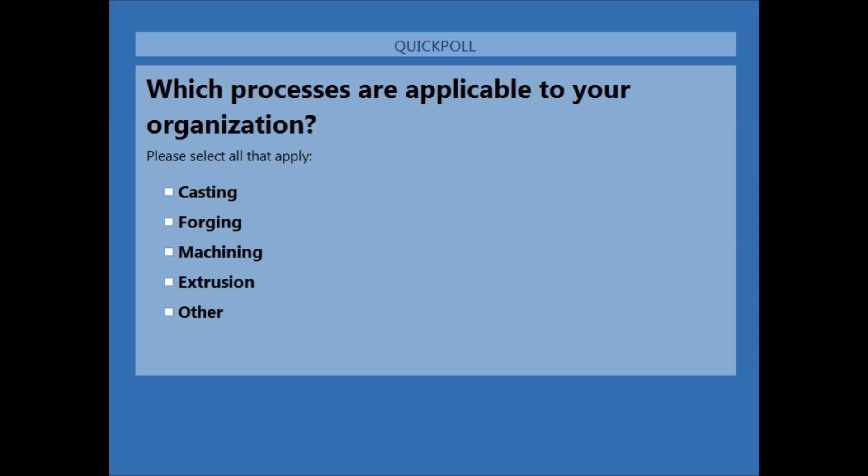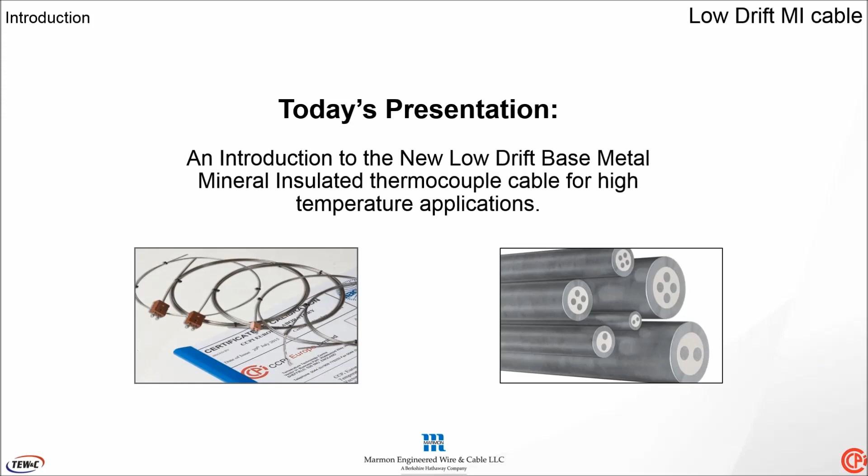We'll get into the presentation. Today's webinar is on the new low drift base metal mineral insulated thermocouple cable, or what we've been terming our low drift product. I invite everyone to download our low drift product flyer, which is available in the flyers section of your GoToWebinar control panel. As we proceed through the presentation, you are welcome to ask questions about the product using the GoToWebinar questions feature, also located in the control panel, and we will answer as many questions as time allows at the end of the presentation.

Just to give a brief background of our companies, TE Wire, together with our sister company CCPI Europe Limited, have partnered to develop, promote, and distribute the low drift product. Both are members of the Marmon Group, which is a Berkshire Hathaway company. Berkshire's annual revenue totals approximately $185 billion. The Marmon Group consists of 175 different companies totaling $8 billion in annual revenue, with over 19,000 employees amongst the group. It has over 300 manufacturing distribution centers worldwide. Within the Marmon Group, TE Wire and CCPI are grouped amongst 13 additional wire and cable companies that make up the engineered wiring and cable sector.

TE Wire, who has licensed the patented low drift mineral insulated technology from Cambridge Enterprise, is a specialized manufacturer of thermocouple wire and cable. It was founded in 1941 with its headquarters in Saddle Brook, New Jersey. We provide both stock and custom constructions with over 14,000 varying combinations of wire and cable.

CCPI Limited manufactures thermocouples for industrial temperature sensors. It was founded in 1984 and has its principal headquarters in Sheffield in the United Kingdom. CCPI is most known for its high quality, high temperature industrial temperature sensors. Both are also companies that are ISO 9001 2015 certified and administer ISO 17025 accredited temperature laboratories.

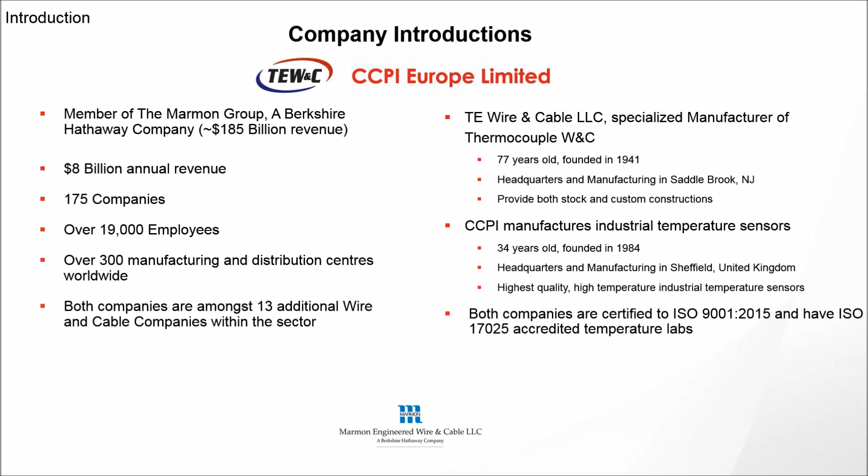Thanks Joe, and hello everybody. As indicated there, my name is Trevor Ford, and I'll be giving the presentation today on the new low drift mineral insulated metal sheath, or MIMS, thermocouple cable. Before I go into the presentation itself, I just thought I'd give you a little bit of a rationale behind this particular presentation. This is the first of a series of planned presentations about this new low drift technology. And this particular one, as I said, is the first one, and it's going to give you the idea behind the development of this new low drift cable, why it was developed, why there was a need for it to be developed, and the history behind its actual development.

Regarding the presentation itself, I'll give you a quick overview of what we're going to be talking about. Initially, we're going to be asking three questions and hopefully answering those questions. First, do thermocouples drift? Then we'll ask, what are the current options regarding low drift thermocouples? And the third and final question: why do we need a lower drift base metal thermocouple? Then we'll move on.

We'll talk about the history of the development of this new low drift technology in the form of a mineral insulated metal sheath base metal thermocouple cable, which is the subject of this presentation. In doing so, we'll have a summary of the investigation work carried out by the organisation that developed this technology, the University of Cambridge in the United Kingdom, and how their research into the causes of drift in base metal thermocouple technology led directly to the development of this new low drift technology.

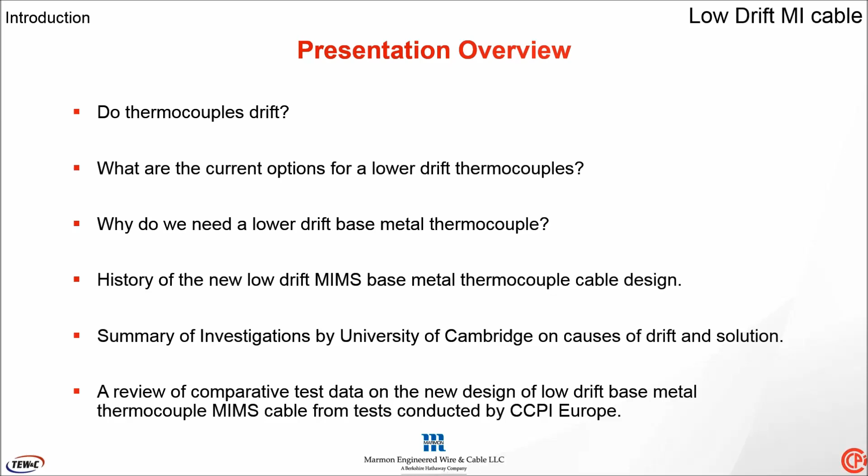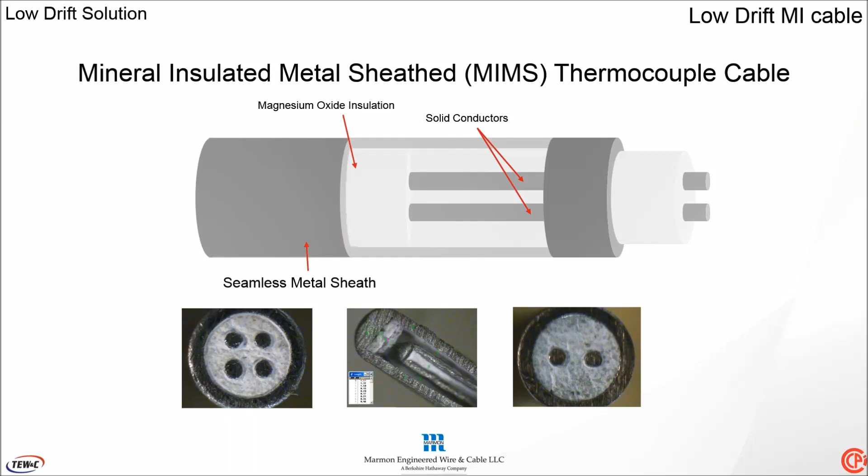Before we do that, though, I thought we'd just give a quick reminder of what MIMS thermocouple cable is. It's where the thermocouple conductors themselves are insulated and separated from each other and the outer metal sheathing by a mineral insulant such as magnesium oxide. The slide you're currently looking at shows the finished product, which you're probably more familiar with looking at.

So into the presentation itself, and the first question: do thermocouples drift? A very simple answer to that question is yes. All thermocouples suffer from the effect of a changing EMF output with time at temperature, usually a reduction in the output, particularly in the high temperature region, and this effect is known as drift.

Probably a better question to ask would be, what is drift level dependent on? There are a number of factors: the thermocouple type, the environmental conditions, the temperature range of operation, and the temperatures the thermocouples actually see, just to mention a few. There are many reasons and many types of thermocouples and thermocouple designs. Some will show higher or differing levels of drift than others. But basically, most of the drift is dependent on both the thermocouple design and the environmental conditions the thermocouples actually see.

As we mentioned, there are many reasons why thermocouples drift. We've mentioned a few above, but really the detail of that is for a different presentation. The point that needs to be absorbed here is there is an issue when it comes to using thermocouples for long-term high temperature measurements.

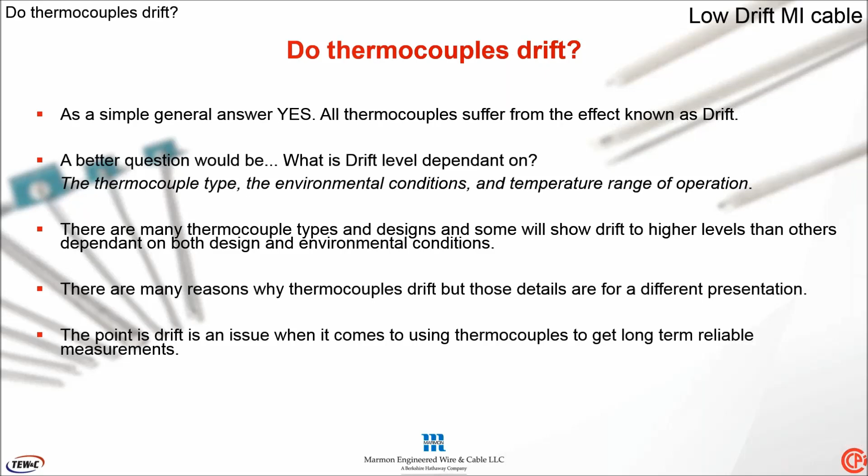So, what are the current options regarding low drift thermocouples? Well, currently, the range of thermocouples known as the noble metal range, or the platinum rhodium based thermocouples, the types R, S and B, would always be the choice for high temperature industrial applications. This is because these thermocouples show the lowest drift characteristics of all the common standard thermocouple types we use, mainly because of the materials they're manufactured from.

However, for the same reason, both for cost and mechanical limitations, these thermocouples are not always an option for industry. The cost is a fairly obvious one: the materials they're made from, the platinum rhodium group, can be very expensive. Also the mechanical limitations: the protection mechanisms needed for these thermocouples are usually ceramic-based sheaths, which are obviously very inflexible and also quite limited in diameters. The most practical option regarding temperature sensors is the MIMS base metal thermocouple design.

This MIMS design gives practical protection for the thermocouple wires for the environments they're used in. In effect, the powder and the outer metal sheathing protect the thermocouple conductors themselves from the environmental attack and contamination. So, for both practical and economic reasons, the Type K and Type N MIMS thermocouples are and will remain the industrial temperature sensor of choice in this high temperature region.

However, both the Type K and Type N thermocouple, particularly when we're talking about temperatures above 1000 degrees C or 1800 Fahrenheit, can also see very high levels of drift.

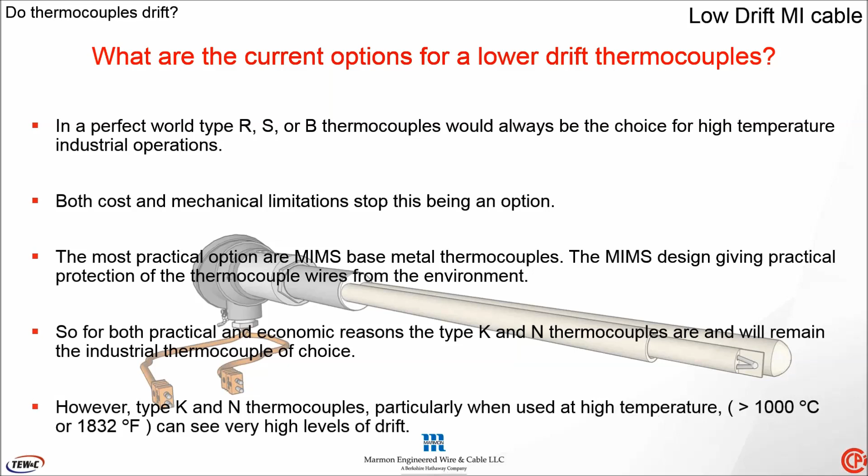So, why do we need a lower drift base metal thermocouple? The most widely used thermocouple types in industry, we've already mentioned, are the Type K and Type N thermocouple. The best overall option from a practical viewpoint is the MIMS design. But there is a growing demand from industry for better measurements in this higher temperature region, a more reliable measurement capability. These thermocouple designs, the Type K and Type N, have not been improved.

We're using the same designs, have not been improved since the development of the Type N thermocouple itself some 50 years ago. Hence, there is a need, with this demand from industry, for a base metal thermocouple with a better performance, particularly in the higher temperature range.

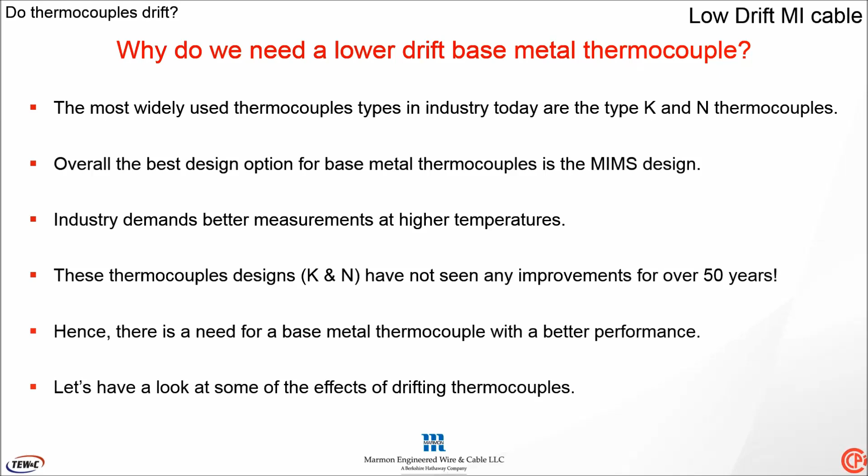We've talked a lot about drift. I'd like to actually show you some typical effects of drift from some data collected by tests conducted at the Cambridge laboratories. This test was actually conducted on some conventional Type N MIMS thermocouples. They happen to be 3 mm diameter Inconel sheath constructions. And the chart we're looking at here shows us the peak performance during some cycling operations.

In effect, the test thermocouples were cycled between 300 and 1200 degrees C over a 4-hour cycle period. This cycling was repeated for some 350 hours during the test. The chart we're looking at, as I say, shows us the top 10 degrees C of these peaks. So the first line you see on the chart is the measured temperature of the peak of the actual cycles.

By the Type S control thermocouple of the environment, really just to indicate that the environment was seeing a steady peak temperature of 1200 degrees C plus or minus half a degree C throughout the full duration of the cycling period of the test.

The first set of data we're looking at here are the blue peaks, which are the results from the conventional Type N MIMS thermocouple. Initially, the results are very close to 1200 degrees C, and for the first 2 or 3 cycles, it repeats the original value very closely. But very gradually, but consistently, you see a reduction in the peak temperature measurement indicated by this thermocouple. This is a classic example of drift, a lowering of the measured temperature of the EMF output.

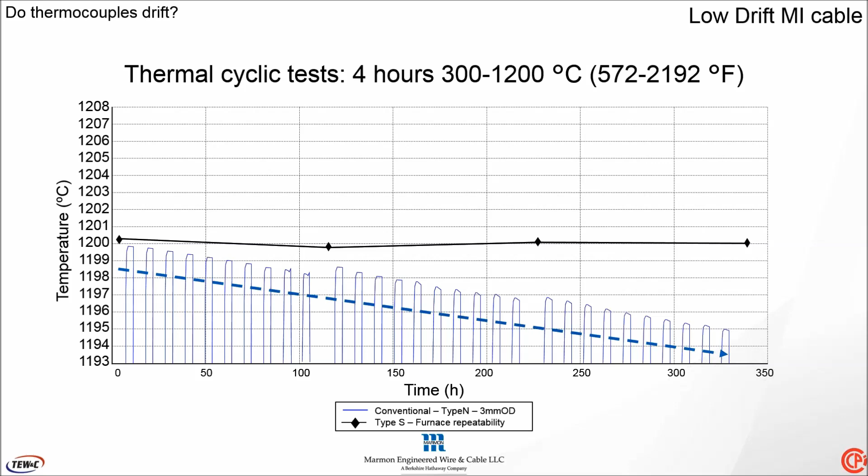We know the thermocouple is still seeing the peak temperature. The Type S thermocouple is telling us that. However, it's indicating a significantly lower value, such that after 150 hours of cycling, it's seen some 2 or 3 degrees C lower, while at 300 hours of cycling it's 5 or 6 degrees C lower. A classic example of drift in operation.

So what I'd like to do now is introduce this new low drift thermocouple option, or thermocouple cable, that is the focus of this presentation. We've already talked about why Type K and Type N base metal thermocouples are the most widely used temperature sensor in industry, particularly in the temperature region above 800 degrees C or 1470 Fahrenheit.

We've already mentioned that the MIMS construction is the best regarding its practical design, because it shows less drift than other forms. However, it also can show significantly high levels of drift above 1000 degrees C, above 1800 Fahrenheit temperature range. These are the exact reasons why researchers at the University of Cambridge, working under Dr. Michele Scervini, have spent the last 10 years researching and developing a new low drift base metal thermocouple option.

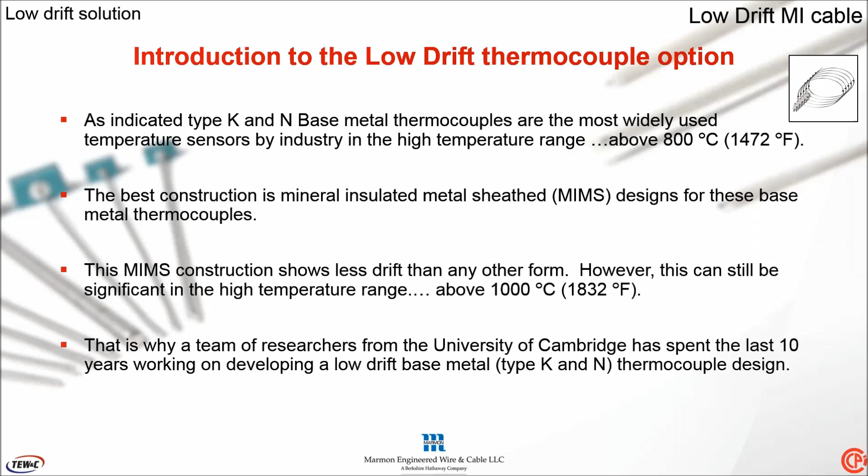What I'd like to do now is give you a little bit of history behind the development. As I've already mentioned, it's been worked on now some 10 years by researchers at the University of Cambridge. They started the project looking at temperature measurement using contact sensors, i.e. thermocouples. The work focused on studying the drift characteristics of these base metal thermocouples and studying the reasons why these thermocouples actually drift in use.

There was actually some very innovative testing developed by the researchers at Cambridge, to such an extent they were able to determine and categorize the drift component of the individual conductors or individual thermocouple legs of a thermocouple combination under various thermal conditions. Directly from this research, this new form of low drift MIMS, mineral insulated metal sheath thermocouple cable, has been developed directly from the research conducted in the Cambridge laboratories.

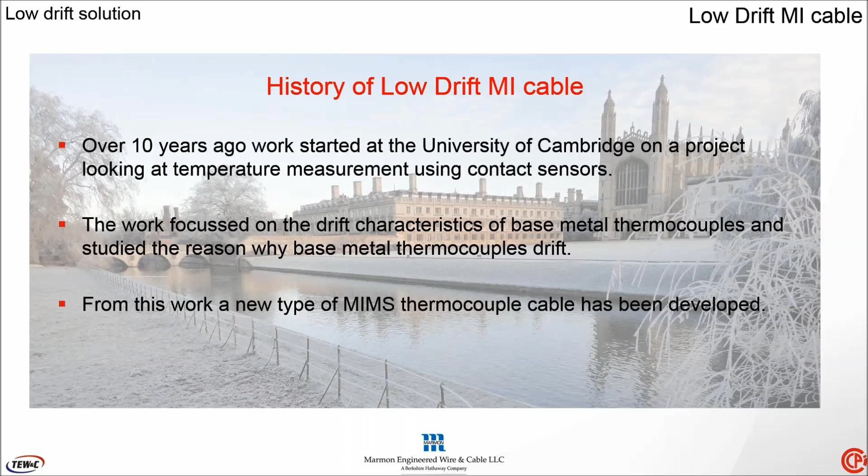So I'd like to give you an overall summary of that development. Initially, the work, as already mentioned, started looking at all thermocouple types, particularly Type K. Researchers worked on both bare wire and MIMS constructions. However, this presentation is really going to focus on the drift developments and work found on the MIMS designs.

What the researchers found at Cambridge on the MIMS constructions was that the main cause of drift was due to contamination coming from the outer sheathing of the construction itself. This is quite an irony, really. The design of the thermocouple with the powder and the outer metal sheathing was actually fulfilling its job of protecting the thermocouple wires from the environment and contamination from the environments in which they were located. However, now it was that the actual metal sheathing became the main source of contamination, and therefore the main source of drift. It would be difficult to change the outer sheathings because these have been designed and were fulfilling their role of design in industrial applications.

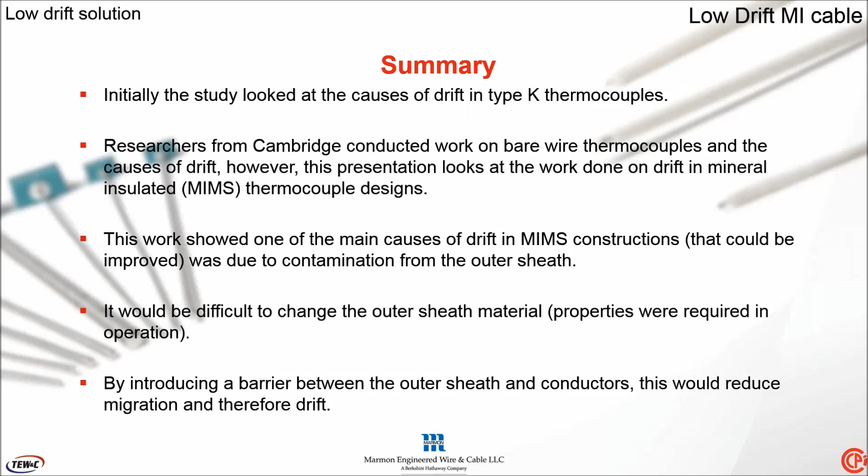But the researchers at Cambridge put forward the concept of introducing a barrier that would sit between the outer metal sheathing and the actual thermocouple conductors themselves. This would stop the contamination or reduce the contamination, and in turn stop or reduce the drift.

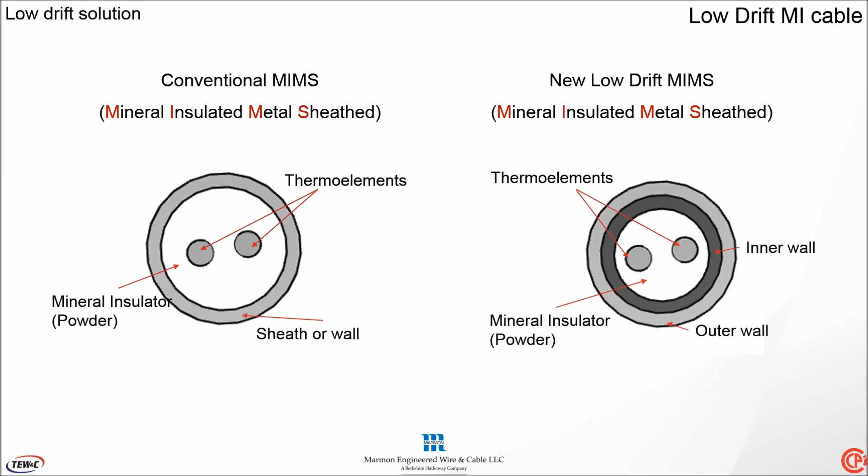What I'd like to do now is show you a set of graphics or animation that shows the concept of what the researchers found, which is that under conventional conditions in high temperature, contamination was caused on the conductors from migration from the outer sheathing itself. This caused a change in the metallurgy, which caused a change in EMF output, which was the source of the drift. With this new low drift design put forward by Cambridge University researchers, this inner wall would stop or reduce this contamination, and in turn stop or reduce the metallurgical contamination of the conductors, and therefore stop or reduce the drift.

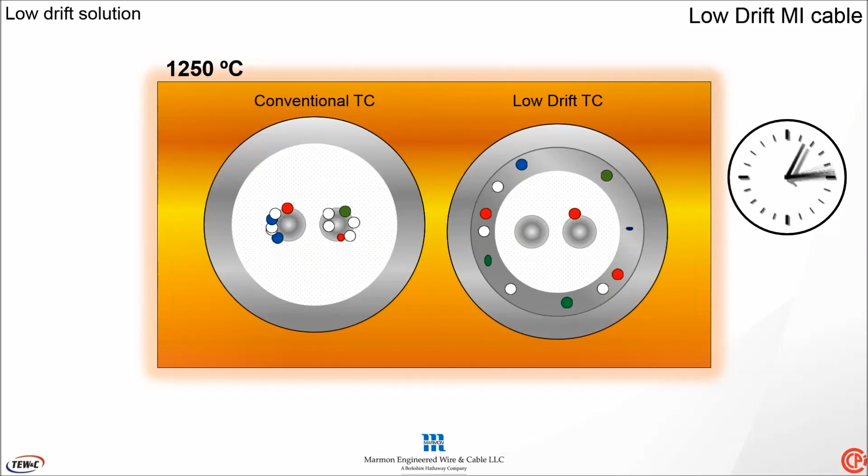So what I'd like to do now is show you a series of test data conducted on this new low drift cable in comparison with the conventional cables used in industry today. This first test was conducted at the CCPI Europe laboratories, on 3mm diameter Inconel sheathed Type K conventional MIs against the new low drift dual wall counterpart.

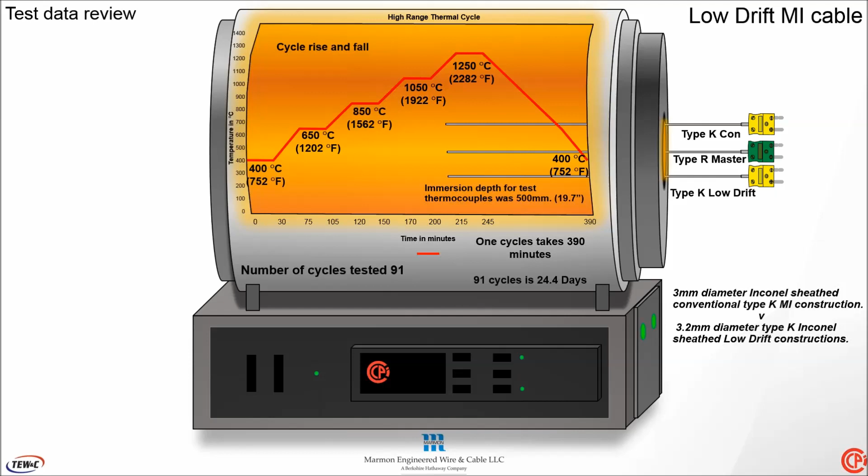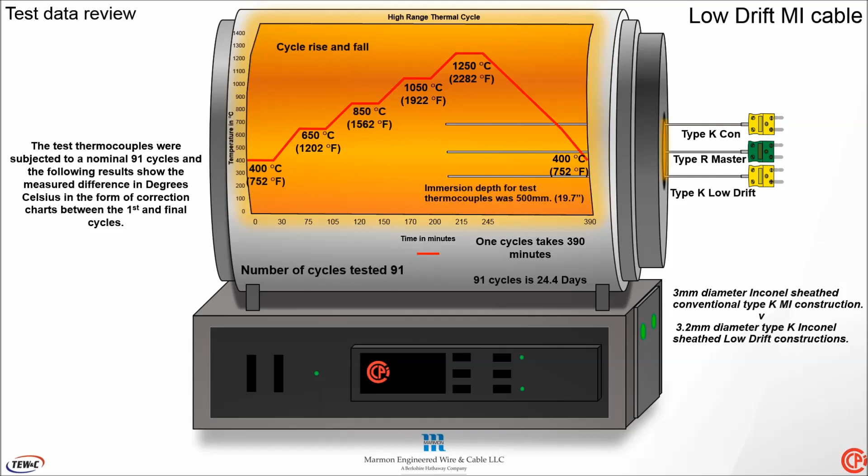The results we're going to look at will show us in chart form the change in EMF output in degrees C over those 91 cycles for the respective test thermocouples. So the chart you're looking at, down the y-axis is the change in EMF output over the 91 cycles in degrees C, across the x-axis at the temperature points of calibration during the test.

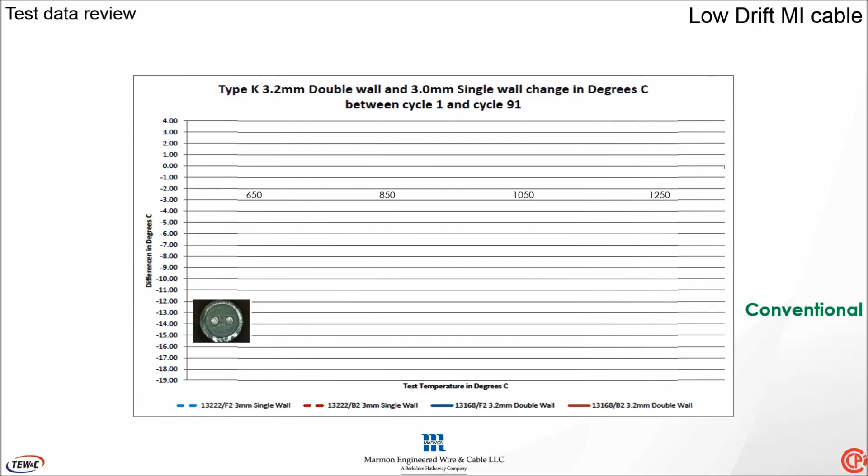So first let's look at the data from the conventional thermocouples. Two units were tested. The first one in blue shows the change over the 91 cycles was between 12 and 11 degrees C. The second one in red shows it was slightly larger, between 15 and 17 degrees C over the 91 cycles. Now in comparison, under the exact same conditions, let's look at the performance of the new low drift design.

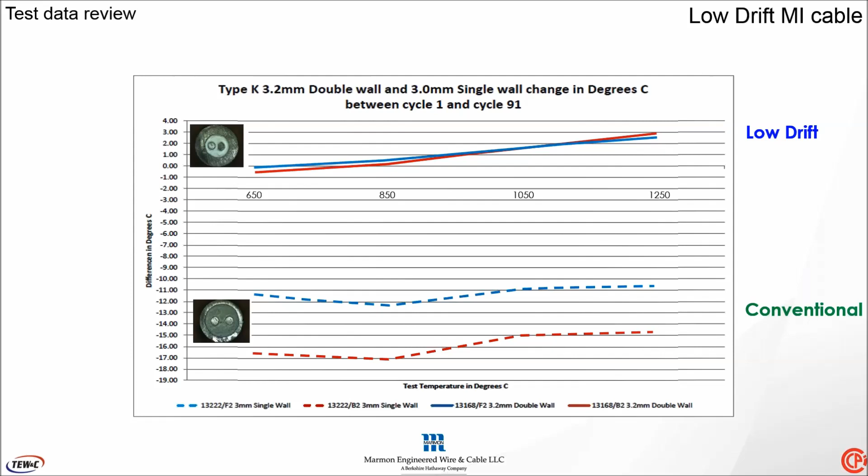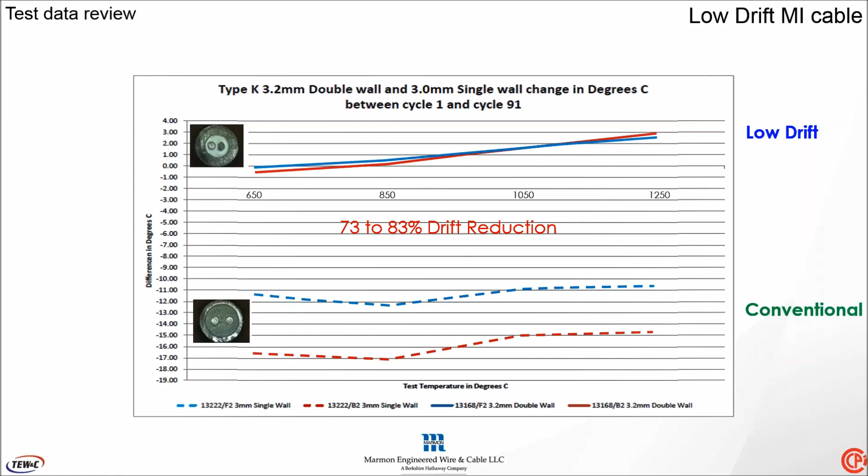Again, two thermocouples were tested. Both thermocouples over the complete temperature range of testing over the 91 cycles showed less than 3 degrees C movement. As predicted by the researchers at Cambridge, somewhere between a 73 and 83% reduction in drift was observed when the new low drift thermocouple designs were compared against the conventional designs being used in industry today.

This next sequence of testing was conducted at extremely high temperature of 1320 degrees C, above 2400 Fahrenheit, a temperature we would not normally recommend Type K or Type N thermocouples to be used at. The test conducted was for some 52 hours, or 2 days of operation, and the thermocouples tested were the same as the previous set of data, i.e. 3mm diameter Type K Inconel sheath conventional against their 1/8 diameter dual wall low drift counterpart.

The results we're going to look at, again in chart form, will show us the correction value or changes in correction value in degrees C at the test temperature of 1320 for the respective test thermocouples. So in this instance, the chart shows the change in correction in degrees C down your y-axis, and the time in hours across your x-axis.

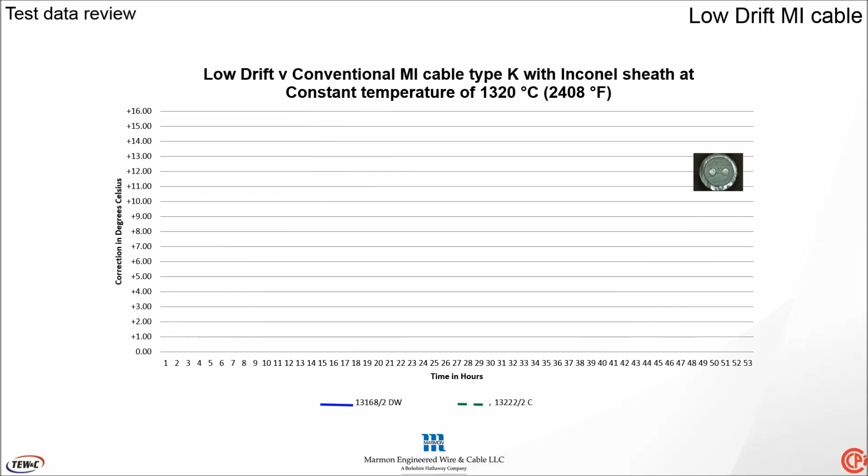First, let's look at the performance of the conventional thermocouple. As we would have expected, a continuous drift was observed, an increase in the correction value, a lowering of the EMF output value, starting at some 3.5 degrees, moving to some nominal 15 degrees, showing a nominal 12 degrees C shift over the 52 hours of operation. Actually quite a good performance for a 3mm diameter Type K thermocouple.

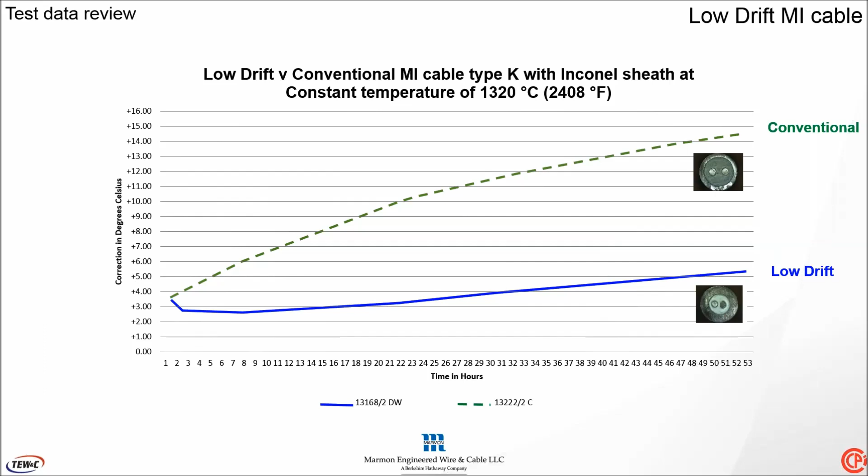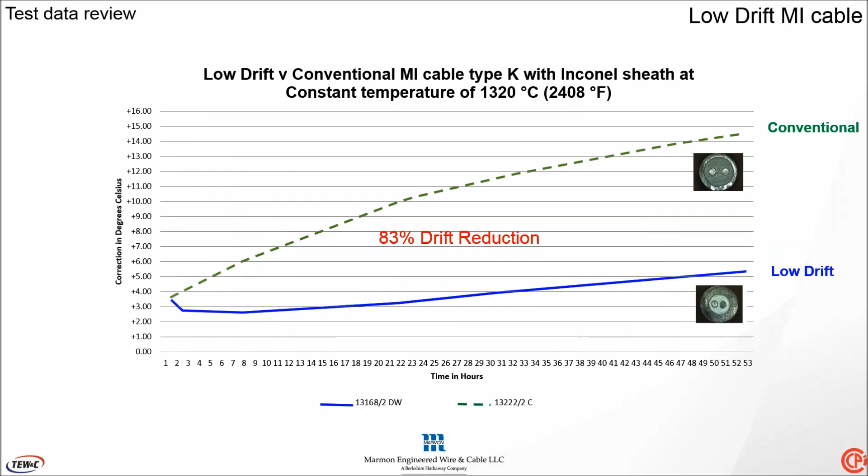Now let's look at the performance of the new low drift design under the same conditions. You can observe a significant difference. Again starting off at some 3.5 degrees, but finishing at less than 5.5 degrees C correction value, less than 2 degrees C nominal movement, or as predicted by the team of researchers at Cambridge, an 83% reduction in drift characteristics was observed. Really, from this data, and from significantly large quantities of data from tests carried out at Cambridge and CCPI, the researchers at Cambridge were able to establish and predict that the drift levels of this new design were reduced between 80 and 90% when compared to conventional designs in this high temperature region.

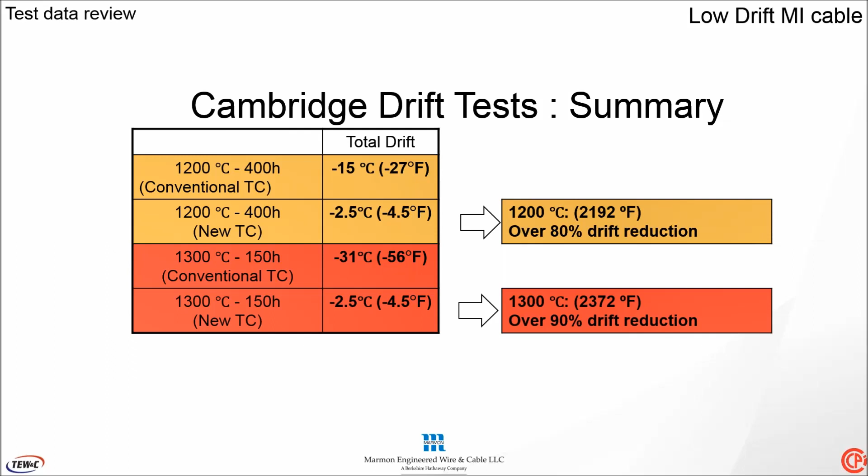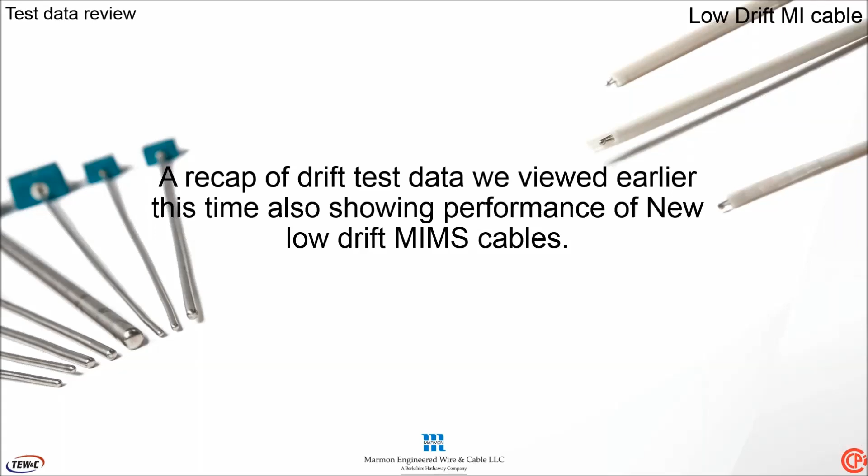But the beauty of this is that value is maintained throughout the full duration of the test to a level of probably better than plus or minus 1 degree C, and really shows the contrast between the new low drift design and that of the conventional design, which shows gradual but continuous drift characteristics, whereas the new low drift design shows this repeatability of measurement.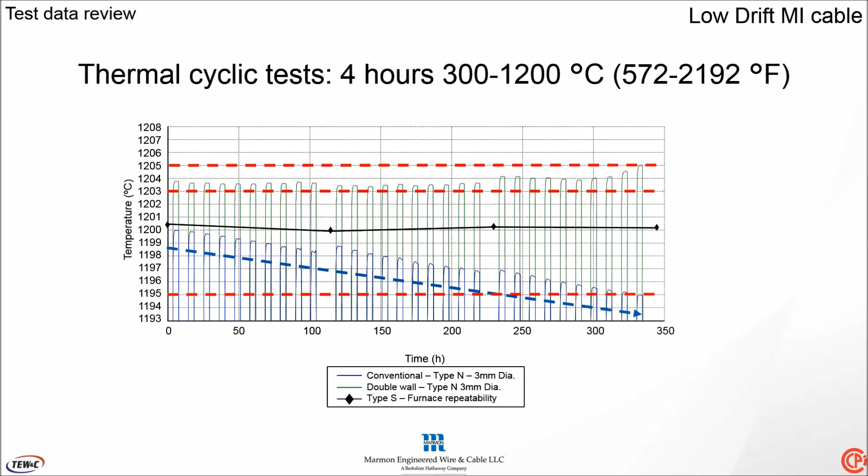So we've looked at data from CCPI labs and CCPI Europe laboratories. Has it been independently verified? Well, there have been some European funded programs called the EMPRESS program. The EMPRESS 1 program was a 3-year program that finished earlier this year. The EMPRESS 2 program started earlier this year and will run for 3 years. Both these programs have seen this new low drift design tested by various European national measurement institutes.

In addition, there has been independent testing in real-life industrial applications. All of the data from these tests have confirmed the results found by CCPI and Cambridge, that this new low drift design, compared to the conventional designs used today in this high temperature region, shows a significant reduction in drift characteristics.

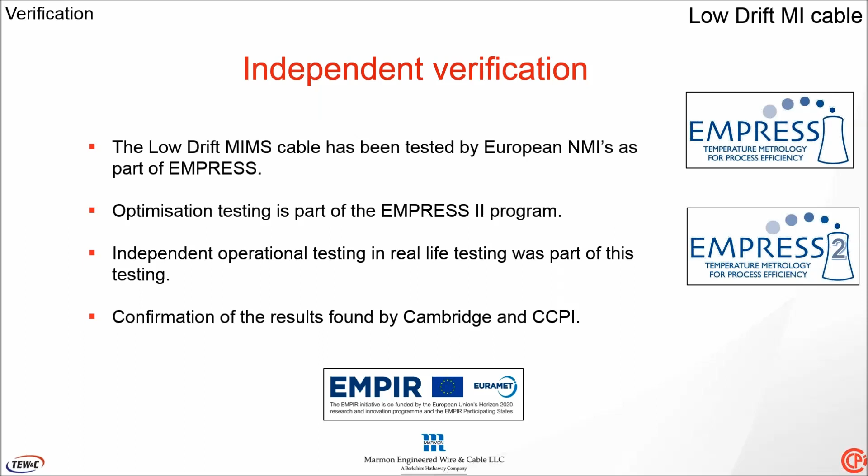So, the advantages of this new low drift cable. We've been talking about the reduction in drift, greater than 80% in this high temperature region, which is the main advantage. These results have been independently confirmed.

Another major advantage of this new low drift design is that the thermocouples are still Type K or Type N thermocouples and perform exactly like the Type K or Type N thermocouple when it comes to EMF output values. As far as operators or users are concerned, no changes in instrumentation, wiring, or operational procedures are actually required. The only thing operators and users will see is simply a base metal thermocouple with significantly superior performance, a better measurement capability, a lower drift operation.

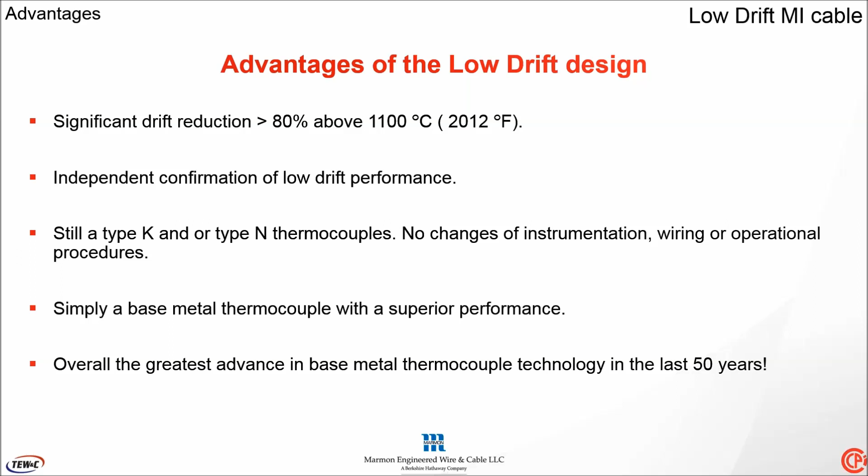Overall, this is why we can say with confidence this new low drift technology is the greatest advance in base metal thermocouple technology since the development of the Type N thermocouple in the mid-1960s, over 50 years ago.

That brings the presentation part to a conclusion. I'd like to summarize what we've been talking about. First, we looked at why thermocouples drift and gave a brief overview. We discussed why there's a need for a low drift thermocouple, as industry is demanding higher temperature operations and better measurement capabilities. We talked about the history and how Cambridge University researchers developed this new low drift cable directly from research conducted in the labs. And we looked at comparative test data that shows the superior performance of this new low drift cable in operational conditions.

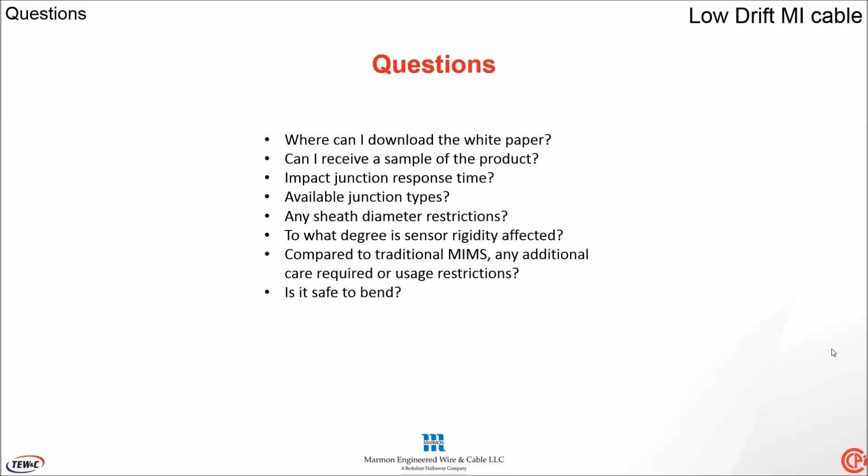Okay, just going to skim here. So one person has asked if this is going to be available online. Yes, we did record this, so if you missed a part or you want to go back, we will have that on our website.

Question here on junctions, Trevor. Exposed junctions, grounded junctions, or ungrounded junctions -- I guess they want to know if that's available. They all will be available. Obviously, exposed junctions, depending on the environment, can be restricted. If you expose the thermocouple wires themselves, the protection mechanism of the dual wall low drift design is actually lost at that point. But they will be available as all conventional MI thermocouple junctions are.

We have a question here on wall sheath. Is it a seamless wall sheath or welded wall sheath? It's a seamless wall sheath as per standard MI type constructions.

Let's see, one more here. How does the second wall of the enhanced MIMS affect junction response times? Well, that's a little bit like the question answered earlier. The first generation, with a thicker wall, will slow the response down. The second generation will perform as per standard units.